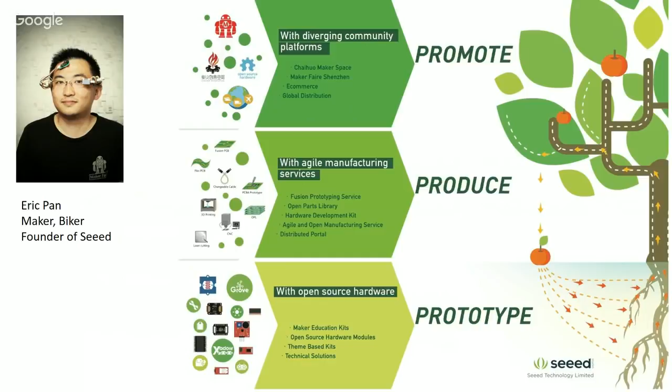First, I'd like to give you a short overview, because I think it's very important to have a different mindset growing from one piece to many pieces. We have a lot of workshops about prototyping, but too few workshops about how to manufacture things.

If we look at the world from an open hardware perspective, it's more like a pyramid. All the makers have ideas, everybody has ideas. But whenever you bring them into a prototype, you become the maker, growing from 0 to 0.1. You have to go further sometimes to have the first working engineering sample, and you become a very veteran maker.

I think a lot of Fab Lab students are working towards this. Like I saw from the last lesson, you've done some PCB by CNC, and then you'll be soldering your own devices first. But today we're going to cover how to grow from one piece to like 1,000 pieces. Whenever you have 1,000 pieces manufactured, you're actually becoming an independent product maker. You can call yourself a hardware startup, because you're not making one product for yourself, you're actually benefiting a larger audience.

If all the stars align, if everything goes perfect, you might want to ramp up to 10,000 pieces. That's where mass production actually happens. If it goes beyond that, you're bridging with traditional industrial resources. It's a huge gap between 0 and 10,000 pieces, but step by step, all the barriers are being lowered. Now everybody, in all kinds of backgrounds, can manufacture their own creations.

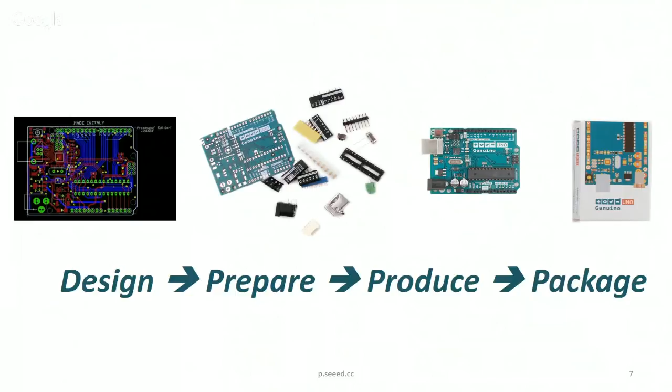So after we disassemble the hardware, on each of the layers we will see these 4 steps. You start with the design. You have your idea, you turn it into a file. Then you need to prepare the materials, collecting them in the same place and same time. Then you actually start to produce and assemble them all into one piece that can actually work. Then you need to package them into a very nice finish to send to yourself or your audiences.

None of this process is easy, because you need to balance between 3 elements: the cost, the quality, and the schedule. They are very much intertwined. If you change the cost, you might affect the quality. If you want to pull in the schedule to deliver to the market faster, you might increase the cost, for example.

You manufacture the same products with the same setup, same material, but you might also have some randomness, thanks to quantum physics or anything beyond that. What we need to focus on is controlling the result inside our expectations. There are so many ways to do that, so many factors that contribute to defects, so many systems and knowledge behind that. But we need to understand that quality is equal from the design to manufacture to deliverable - the only matter is how do you promise to deliver and how do you achieve it. It can be affected by the personnel who operates it, the materials, how to measure and evaluate, what kind of machines you're using, the methods, and also the environment might affect the quality.

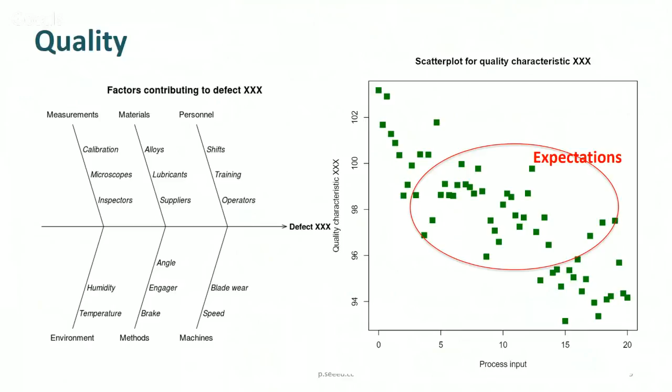And it might be a nightmare for a lot of hardware startups, because the schedule is always unstable. We have already seen so many Kickstarter campaigns delay for even more than a year, or even get cancelled. For the manufacturers, you have a lot of components that need to arrive on time, but the supply chain is very dynamic.

For example, there might be some turmoil in some countries. For example, in Tianjin port in China, there was an explosion, and the result is that at that port, at that time, there was an OLED shipment that was totally destroyed in the disaster. So in the following few months, we didn't have enough OLED screens. No matter how good a plan you have, these kinds of disasters are out of control, and the supply chain itself is not static and might change.

So we need to adapt to the changes. Also the production line has its queue, because the goal of the production line is to keep running to increase utilization - they cannot wait for you forever. Whenever a new production comes, it usually needs to wait for the last batch to finish before starting new ones. If there is any problem, it has to go back and wait again. There are so many things we don't know, problems that are totally unexpected. So because of these issues, before you give up, project management is very serious.

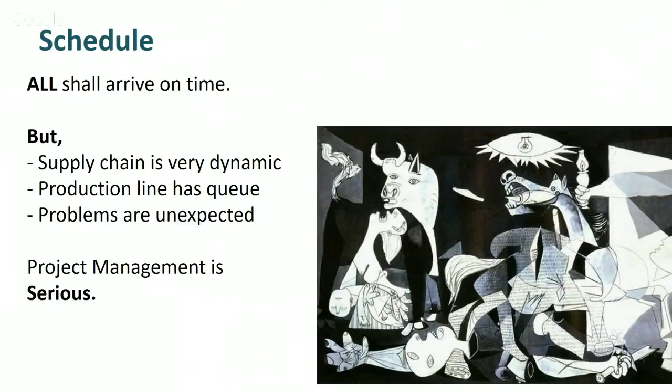And the final thing I think is the cost. We always look at electronics products and we can tell the bill of material cost—how much is microcontrollers, how much is resistors. They don't look expensive, but we need to add a lot more cost into the manufacturing.

Like the manufacturing itself, you need to do some toolings for the manufacturing. That might be some setup fee, but you need to equalize them into the long-term manufacturings.

But what's worse is behind the scenes. A lot of people don't know that they need to consider the cost of engineering. There are also so many costs on management—it's not only managing your team, it's also managing the supply chains, managing suppliers, managing all the disasters.

Then you need to spend quite some cost for marketing, and also certifications if you want to sell offline, that might be a good cost. And also logistics is becoming more expensive because of the shipping hassles, and also because we are doing a lot of innovation costs, because you make mistakes.

The mistakes will generate defects. All the defects, they will be in your bills. So we need to be seeing them very seriously.

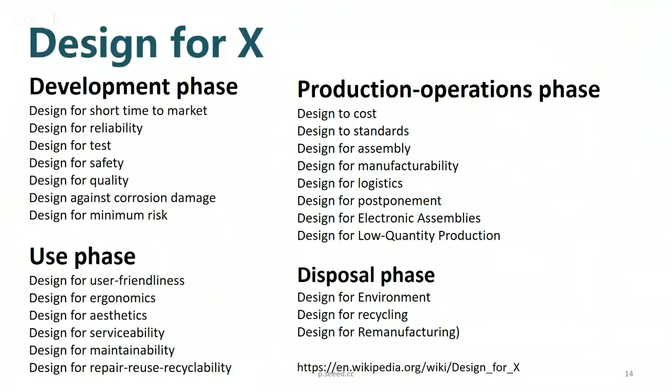We have a lot of issues because people come to the field like a software team. A software team is like a band—you might need only 3 or 5 people to come up with a design to make it working and post them on iTunes. But for hardware, you actually need a big orchestra.

You need a whole team with established knowledge about issues about DFX. So a lot of teams, they come to play orchestra with a band. That causes a lot of issues because of so many things that you don't know. You know nothing, it's slow because you know nothing.

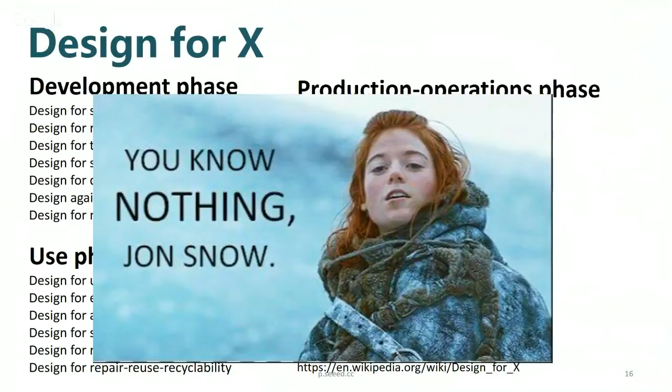You didn't know so many things that the factories knew, that you are not as professional as their previous customers. Because we are newcomers to manufacturing, this causes a lot of problems because of the inequity of knowledge. But the remedy, I think, we look at manufacturing, design from it. A very important element inside of this is open hardware.

We use a lot of open hardware for prototyping. Maybe on your table you have Arduino, Raspberry Pi, so many open things. But it's also a perfect tool for you to consider the supply chains, because you're actually sharing the supply chain with other people using the open hardware.

For next steps, I think we need to open source the manufacturing processes, so we will understand all the strengths by looking at the manufacturing process itself and come back to our laboratory to design something that matches the process. I think that's a hope for Fab Lab, and also what we are trying to do is manufacture decentralized. It should be more like a service covering different locations with the same process and materials.

I think that's where we can make the DFX or manufacturing much easier, because with different teams and different products, we are actually training ourselves and sharing knowledge among different projects. That's a big word, but let's see the details.

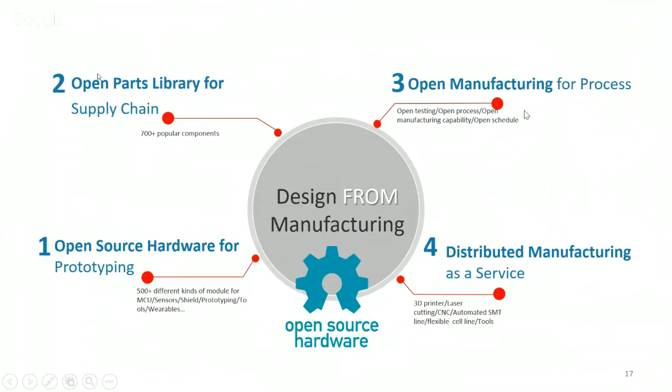So this is one example from our friend called Garley. He has an inspiration of the electronic eggs - he wants to use human beings as the electronic pets. He had the idea about 20 years ago, but didn't have the tools to do that. Now in 2012 he has open hardware. He tried to put together some modules to make the first prototype and a 3D printed enclosure to make it working.

About 3 months later, he started to make engineering samples to shrink the size, working with maker groups to do a layout over again. After half a year, he finally used crowdfunding and SNS promotions to get the idea from 20 years ago into the market. But you see, actually the open hardware has facilitated the whole process.

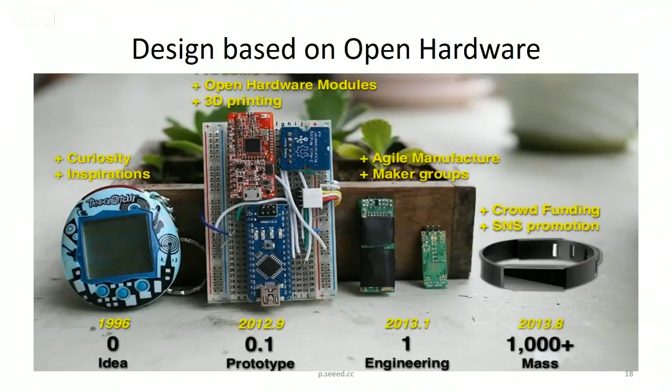Because we are having more and more platforms to suit different usages, and we have more modular sensors and actuators - they are actually combined together to come up with a whole solution. And we will have more knowledge sharing and support from different channels, of course including the Seeed Wiki.

And also we have project inspirations from Instructables, from people's blogs and Twitters. We are actually not only making the prototype easier, but looking at what people have done, have failed, have succeeded. We can follow their paths to facilitate the way we manufacture new things.

And also, thanks to 3D tools, they are becoming easier to use. They are becoming free, and more cloud-based. You can actually open some cloud-based 3D tools to collaborate or find some experts to help you.

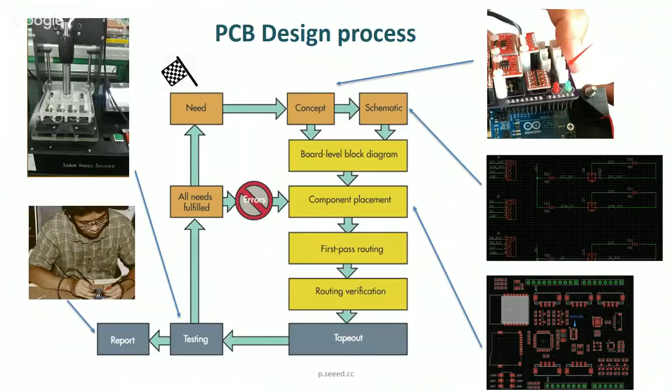So if everything is perfect from what you have seen for that stage, we can move on to prepare - we need to gather all the materials together. If we look at electronic products, I will show you some examples just by my hand, but there are so many categories. We can start from a few.

I think for a lot of us, the major issues are on the components, both active and passive, like ICs, resistors, capacitors, because you might meet issues on lead time and quality. The lesser risk ones are the standard mechanical components, like rivets, screws, nuts, and also standard accessories, which might be very low risk because they're substitutional.

For packaging materials, you need to consider it because it's part of your product, but it might also affect a lot on quality. The materials you use, the printing, the quality, the color, that might differ from what you're thinking.

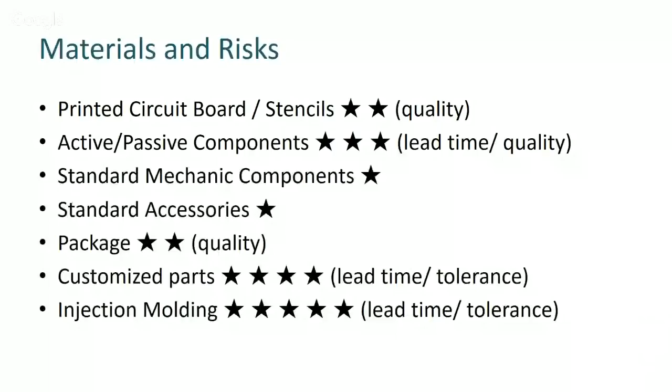You might have seen the bill of materials, but in real manufacturing, if you give the task to someone on the other side of the planet, you need to make sure everything is right, everything is clear, and everything is feasible. I will send the slide later, so you can look into the details yourself.

But there are some hints for the bill of material DFM. Please don't assume people know what you know. I've seen so many bills of materials that just tell people, 'Oh, here we need some screws.' That's it. But how could I know what kind of screws you want unless I have the samples, unless I measure it? So don't assume people know.

And you need to always have a plan B. What if the components you used are extinct? Very usually we just take some components off our desks, or sometimes we unsolder them from other products. But that component might be extinct, unavailable. So try to have a plan B.

And whenever you are preparing the BOM, please leave no room for ambiguity. You need to make sure if you are talking about an IC, you include all the package details, whether it's industrial grade or just something that works. You need to be very, very clear. Imagine that you are working with a computer without too good AI.

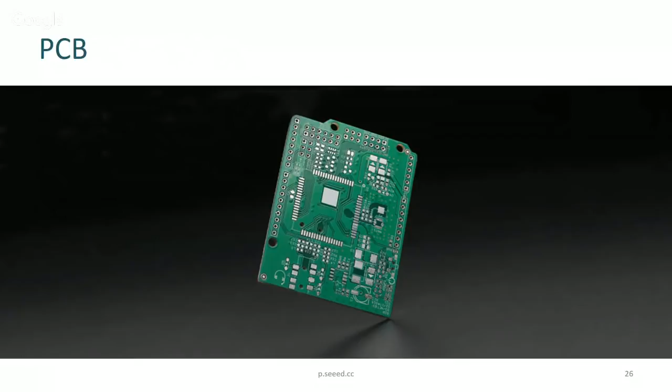So bill of materials, they are a very routine problem in manufacturing. So we look at PCB. PCBs are actually easy because they are very standardized and very digital.

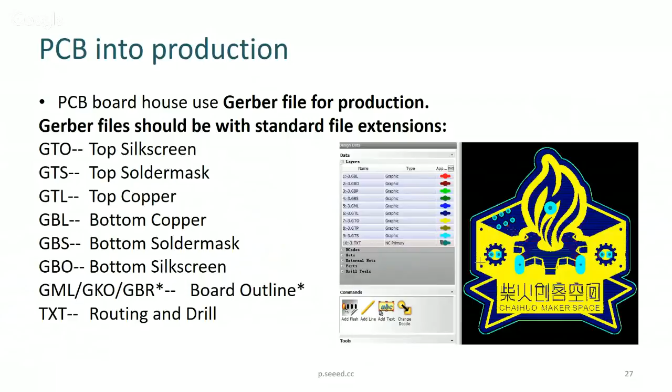Whenever you bring a PCB into production, I think you will learn later in Fab Academy the different layers, screens, solder mask, copper, etc. And here's a video. If the video has too much latency, you can open the links at the end of the slide.

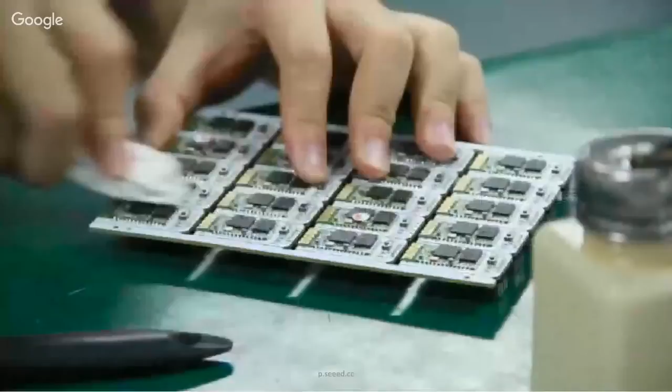But for PCB, we also have some hints for design for manufacturing. You need to look at the supplier's process spec. If your supplier is your CNC machine, you should look very carefully at the precision it has. If you use some fab house to do the PCB, you need to look at their spec, and leave some buffer if possible, because that will increase the yield of the PCB.

And whenever you're designing the PCB, you need to think ahead about how people can assemble the components onto the PCB. So you need to make sure the components that need to be polarized are marked clearly.

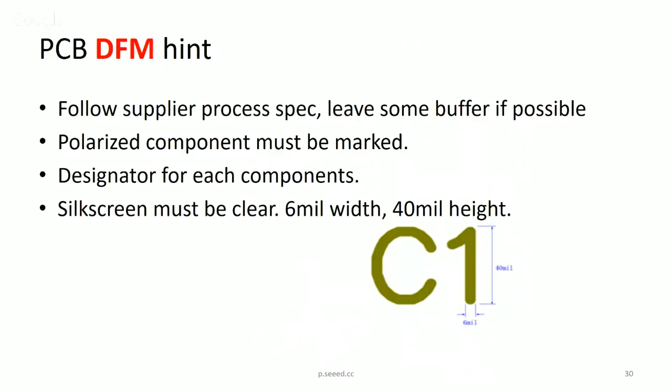I think the silk screen is much more important for the open hardware world, because we are usually shipping with the PCB only, so the silk screen has to be clear. To do that well, you need to control them to like 6 mil width and 40 mil height, so you can guarantee the printing quality.

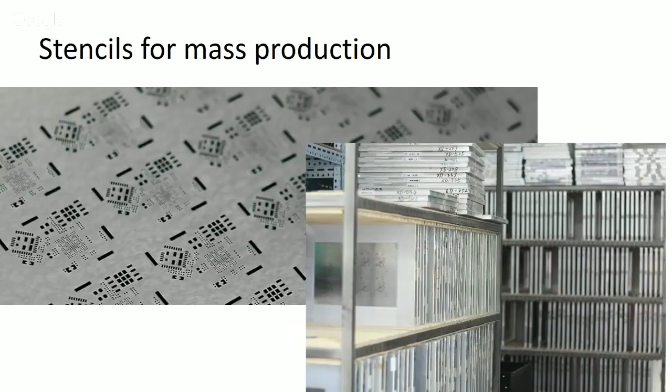After you have the PCB and want to bring it to manufacturing, you need to have the stencils. It's very similar to silk screen printing, but now you're printing with solder. For each of the products, you might have a different stencil. That causes a lot of waste, but it's very critical, and we keep a room of all the stencils, used and expired.

You might be very clear about the active and passive components, but I don't have enough time to explain into more details.

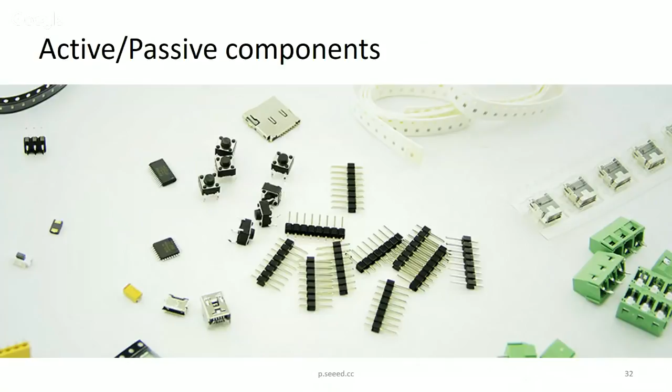One rule is to try to use the popular components. Where can you find them? One simple way is to find the most popular open hardware board, see what components they are using, and try to reuse those components. Like, for example, the ATmega328. That's something you might want to share.

For regular resistors and capacitors, that should be no problem. But if you choose a button, try to use a very standard, very popular button, or you might get jammed looking for that button.

We have an example here where we tried to calculate: among the projects we've done, the most popular 100 components consist of averagely 30% of the bill of materials, which means sharing the library can mean sharing the supply chains. This reduces cost, lead time, improves quality, and is a way for people to share knowledge.

Like Espruino, a project we did for a Kickstarter campaign a long time ago — it went from PO order to shipping in only 20 days. The only reason is that it uses a lot of common, very popular parts.

We'll go into more details. We have a new library called Open Parts Library, and our friends at Octopart also created an Open Parts Library. You always try to work with the community to select the most popular components.

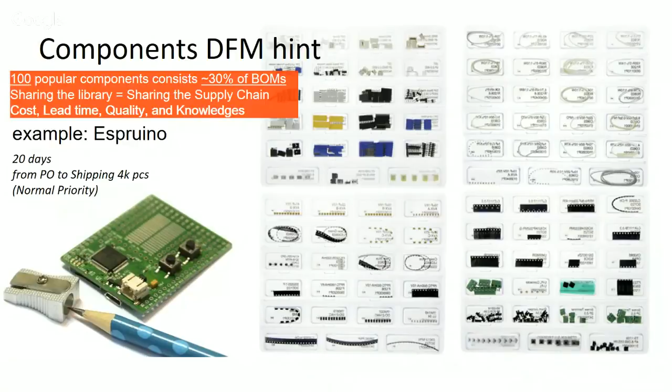We'll also have more standardized accessories, because they're too standardized. For small volume, you don't worry about them, but if you're in a larger volume, you need to find the suitable factory and make a long-term delivery plan with them.

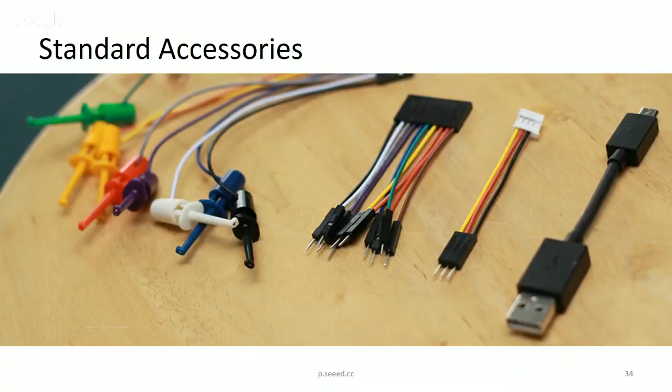Make sure all the qualities align with your specification. Packaging is something you cannot avoid, and it will totally affect things, but it's not the importance of our topic today. Remember, it's also part of your bill of materials — you might want to include the static plastic bag, the stickers, everything into your bill of materials.

Or you might be waiting for them to get the whole project done. For customized projects, I can give an example where we try to align mass production factories with our laboratory — if we can customize in our own equipment, and find a factory that has thousands of the same equipment, it's much easier for the customer's customized parts to get duplicated.

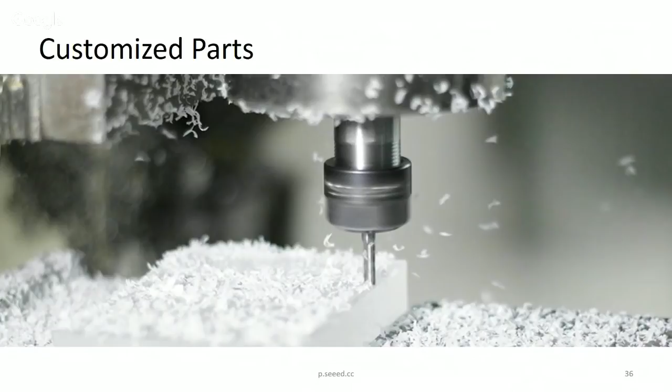As for injection molding, I think it's a very painful process to introduce, so we'll leave it for some other time.

Finally, imagine that we are cooks, we are chefs, and we have all the ingredients lying on the table. The nightmare, the real nervous moment, comes whenever you assemble. Only by assembling can you find a lot of the mistakes — you realize, oh, I have bought the wrong materials.

It's not fun, and if you look at the whole assembly and test process, they can be very complex. But why are we doing assembly and test? It's because you don't want to do it yourself.

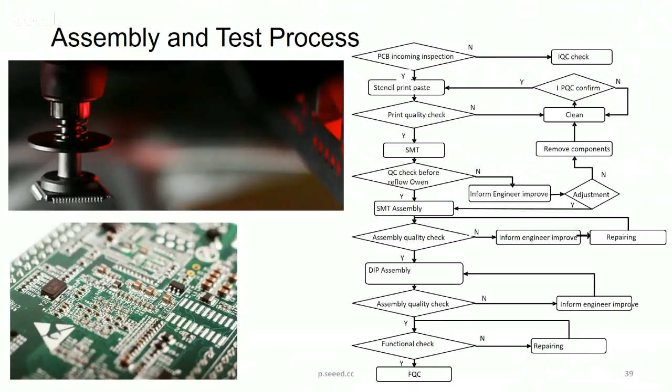So this is how we put the solder paste onto the PCB board. The first layer is the stencil, and the solder will just go down to infiltrate into the PCB itself. That's very simple, but this also requires a lot of precision, and the way you do the stencil might affect the result.

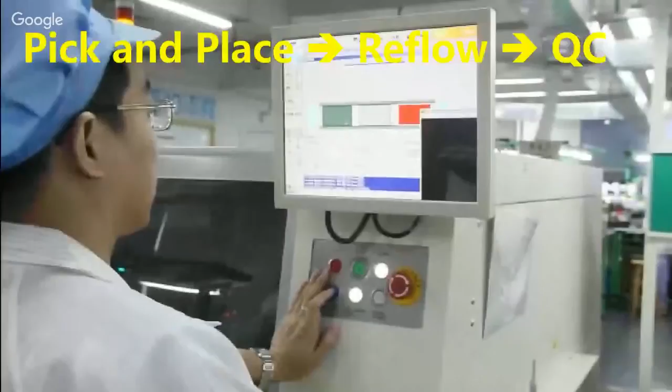And then to pick and place machine, and also for reflow. You might have already seen the pick and place machine. They're actually doing something very simple, putting the components onto the PCB which already has the solder paste. But imagine you have to put so many components onto so many PCBs, and make sure they have the same result, fast enough to save time, and don't make stupid mistakes.

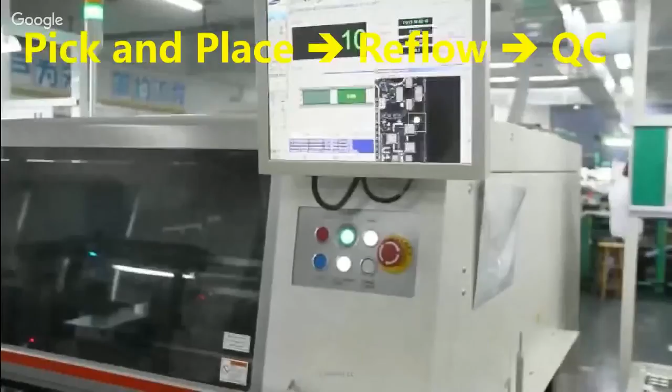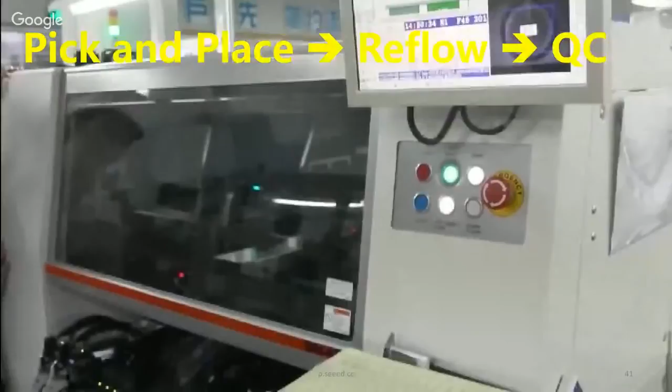So you will see on the screen they have some optic alignment. This is mark point, and this is the pick and place head. Sorry, because it's a bit dark. On the bottom of the screen, there are actually reels of components.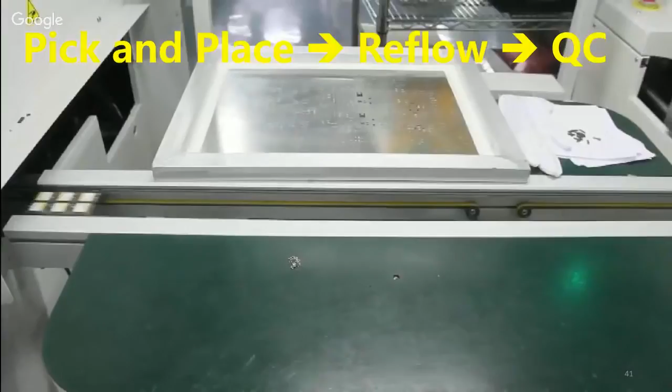Please, if you have time, watch the video over and over again, because you will know how the machines work. And on the other hand, you can design according to the performance and behavior of the machines. So whenever pick and place is finished, the components are like glued to the PCB.

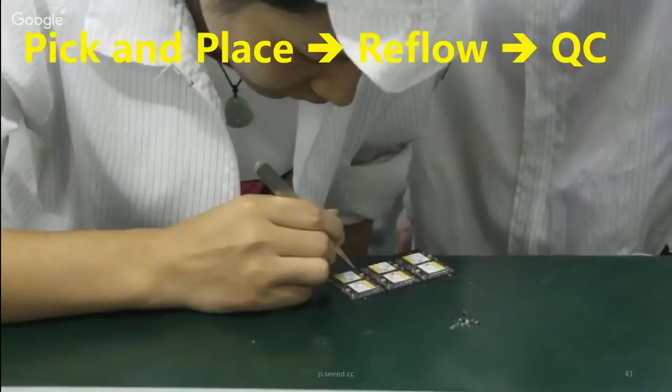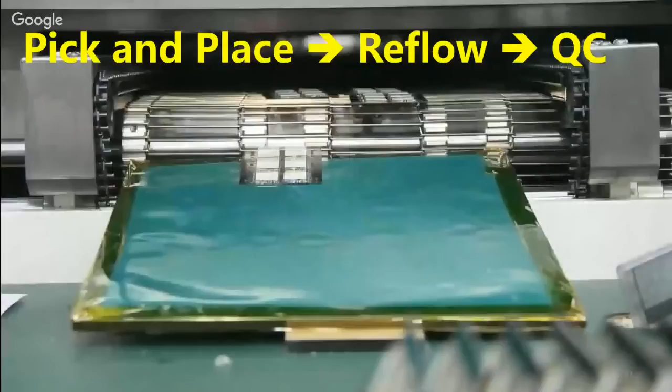They will do a visual inspection to make sure most of the things are right. But they are like uncooked - they need to be cooked. And if there's something too big to fit into the pick and place machine, sometimes for small volume, we use the hand manually to put them onto the board. And that's the oven - it's actually an oven, but with more precise temperature control.

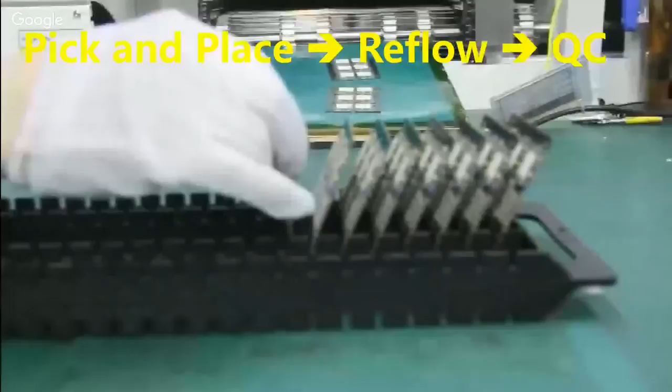After going through the oven, we mostly finish the assembly process, because all the components are in place with the electronic circuit board. And they will do the QC check again. I will show you some examples of why we need so many steps to control quality.

As we just explained, the reflowing oven is an oven, but the difference is they have several zones. Actually, the more heating zones the reflowing oven has, the more precisely it can be controlled. So it has preheating to make sure things are warming up, and there's thermal soak, to make sure all the components are warmed up to an extent ready to be reflowed.

I don't think I'm going to explain so much about that, because you can dig into the details, but that won't affect much what you've done for design. But it's good to know. And also, more important for us is to understand the issues - we are sorting the issues.

The biggest issue for SMT is like tombstoning. The SMT components should line perfectly on the surface, but sometimes one end comes up because the components might not match the dimension of the actual design - meaning the PCB footprint does not fit the component itself. So make sure the pad matches the package of the components.

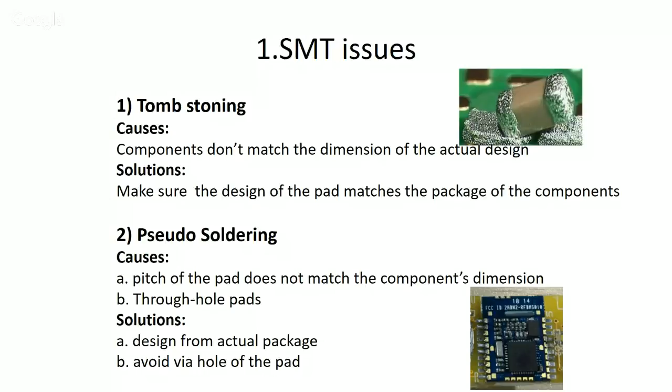So from this we can see a lot of the QC process is to check out and find these issues. But the reason that usually causes these issues is from your design. So you might get your design working in the first piece, but imagine in the long run, in a more complex process on the other side of the planet, they might have more issues than you expected.

And also we have more problems, like there is no mark on the pads, so there might be some errors if we have to process manually. And there might be some mismatch between design and the pads, causing some problems in the manufacturing.

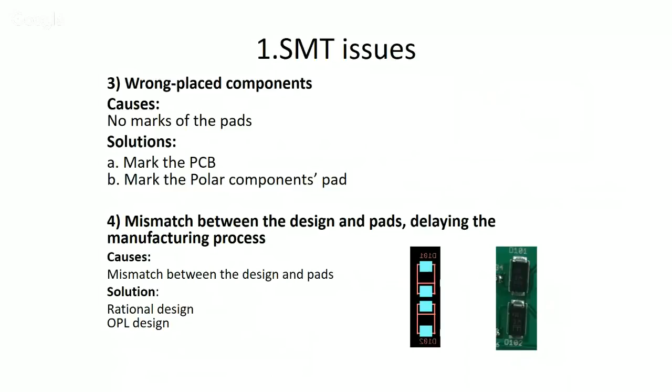So these are some specific cases, but generally speaking, I think we need to have some compassion for machines. Machines are not slaves, they are our partners, they are helping ourselves. So we need to understand how the machines work, and we comply ourselves to try to collaborate with the machines to make sure our designs can be very easily done by the machines.

From that, we can have one more tip, which is we need to align the same components in adjacent order. For example, we can see from the video, the pick and place machine actually gets the components from the reels and then puts them onto the board. So if we are targeting the same reels, they can be much faster than switching to different ones.

And you will try to leave enough margin to the edge of the PCB, because there will be some belt on the edge, the belt might have some grippers. So if you put the components too close to the edge, they might be moved.

Also, during the video, we're actually soldering them on one side, which means if you put components on the other side, we need to do it over again. So let's try to put all the SMT parts on one side of the board.

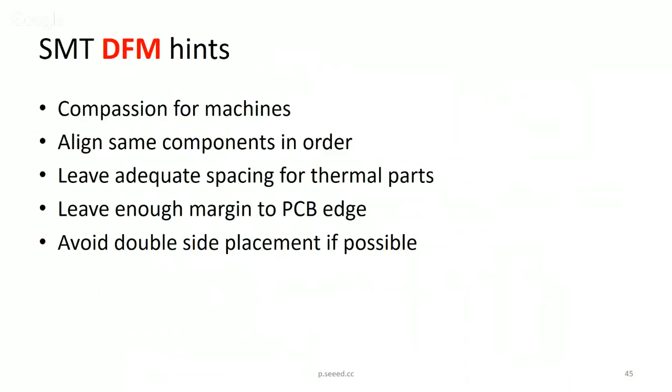And especially for the open hardware community, we are having more through-hole soldering than everyone else. It's easy for hand soldering to verify in the very beginning of the process, but it's actually difficult.

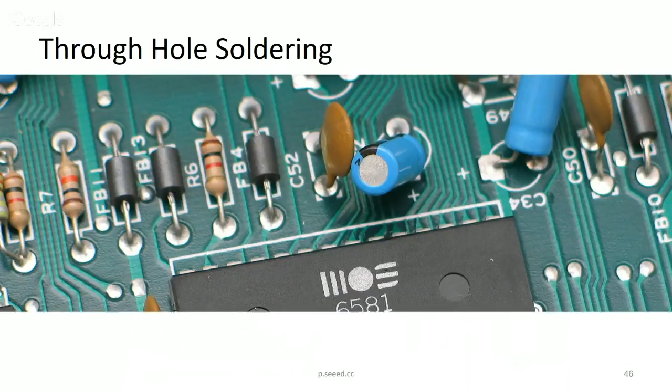This is a semi-auto through-hole soldering machine. I don't need to explain to you how to solder them because you can do it yourself, but it's actually a solder pot. All the boards, whenever they're placed in the right spot, sink into the heated solder and come out.

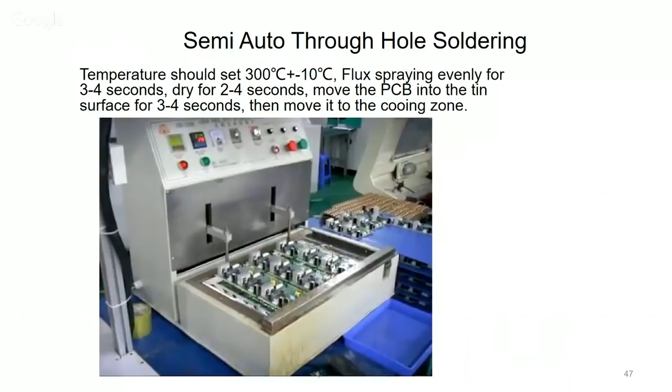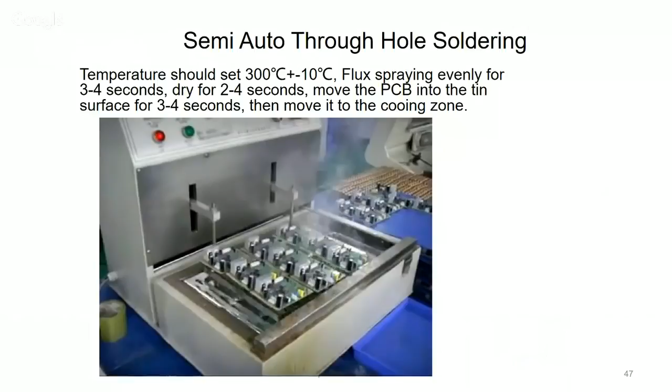So we always see that electronic manufacturing is very close to cooking. It's a part that actually makes this mature. It has to stay in the hot solder for quite a while. You will see the smoke. They are crying, but that's their destiny. And for a while, they come up again. Okay, perfectly soldered, or we can say it's like glued.

And be sure to wear some gloves because it's very hot. And I think the process is evolving as well because you cannot avoid it. Sometimes you have big components, sometimes you have pin headers. And we have some automatic soldering machines, and this is one of them.

So this is like robots. You may see that they require some specific fixtures, and you also need to program it. Okay, I can watch it over and over again.

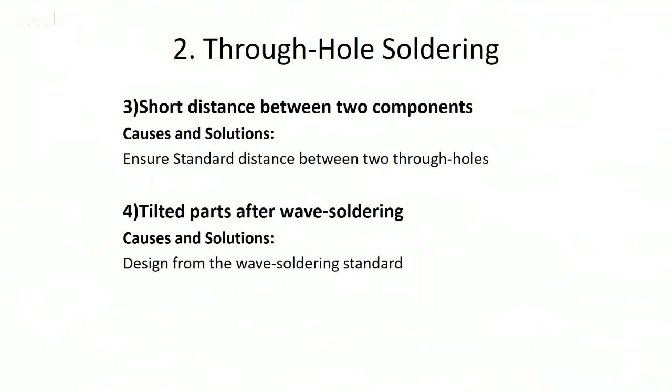And also there might be too short a distance between two components, making it difficult to solder, either for machine or for human beings. And also there are some tilted parts after wave soldering, you might need to strengthen them with tabs or extra support.

So for DFM, I think if there is another chance for you to design, you need to keep space for each component, at least 0.5 millimeters. And you need to ensure the space is enough for manually soldering, repairing, or even verifying. And more importantly, please avoid through-hole soldering if you can, because it really does not fit for mass production.

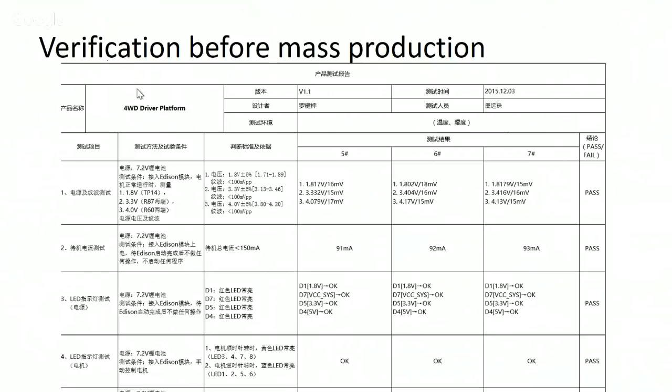There are so many test methods and priorities. Priority means how important it is to us, supposedly to simple open hardware projects. PCB inspection systems, there'll be like e-test, there'll be some visual inspection. We don't need to worry much about that because they are usually done by the suppliers. Secondly, there'll be ICT, called in-circuit test. It's very common for simple projects, and we have used a lot of them, and you might be using that too.

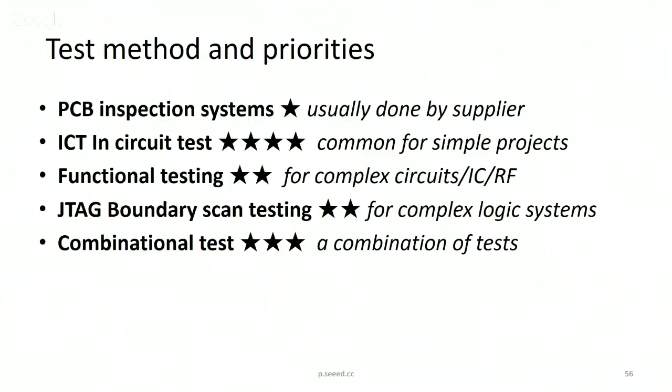We also have functional testing. They are more for complex projects like IC or wireless things. And for complex logic systems, you might have some JTAG boundary scan testing. I think if you have a system like an Android project, you might be using that because there's a very difficult way for you to measure all the memories, etc. But for usual testing, you need to combine some of these testing methods to make sure you cover all aspects of your project.

So what is a good test plan? I've asked some experts and they don't give me a good answer. I'm trying to summarize it like this: a good test plan is actually a killer, a good killer of defects. The most important rule is like a firewall - no underkill. Underkill means it's a defect, but the test plan does not tell you it's a defect, and lets it go. So it has to make sure it excludes all the defects.

But whenever you have all the test means to make sure the quality, you don't want to have too much overkill. Overkill means it's a good product, but you might set some threshold too tight, or it might be disturbed by external elements that you think is wrong. So the best is we examine the units once, and we tell the good from the bad for once. And the testing has to be fast - it's very important that we don't want to use half an hour to test one device on the manufacturing floor.

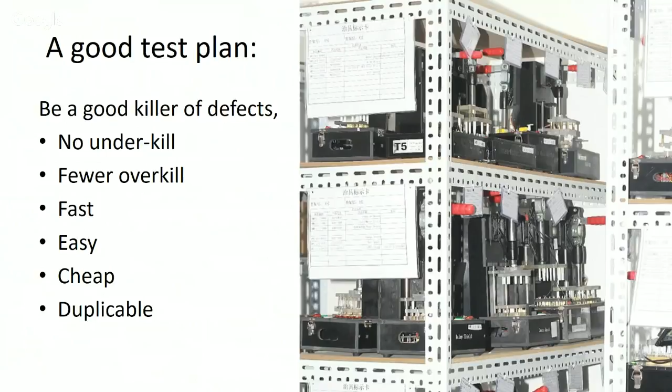And this is the legendary test jig. There's no rocket science inside - you open it up, it might be just an Arduino. To the right is what you see when it's operating. It's better to have some buttons, the basic UI - I know you guys aren't very good at that. And also it's better to have some screen, or maybe in the future we have some wireless network to collect the results. What we show here is a handle, so it's a manual testing fixture. It's cheap, but whenever it goes to large volumes, it can be automatic.

I suggest in the future, you might want to design the test fixture as you are designing the product. The test fixture can be as simple as an Arduino with some special circuits to measure the input, output, voltage, current, etc. And you can use a laser cutter or CNC to make the box.

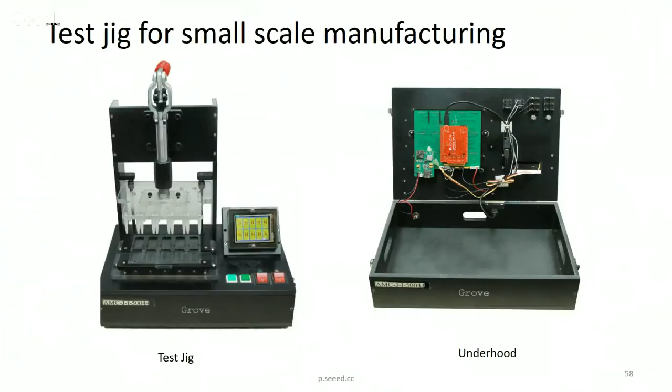You can make it much cooler. This is just some enclosure we get from the local supplier. And the most precise thing is on the test bed. It's like needles on the bed, but you need very precise holes to make sure they match your product. And here is the packaging with the standard operation procedure.

Please don't forget, packaging is something you also need to design very carefully, because it affects a lot on how to assemble them and how to ship them, to protect the product, to make it good looking, for your user to have a good unboxing. I'm not showing the packaging for Reflow because it's taking too long.

It's more than just putting things into a box. You need to put them in a sequence, and make sure everything is placed in the right direction. People might make mistakes, but we can design to make sure nobody can make mistakes.

Sorry, this will be jumping. So for the testing, sometimes we cannot make a test jig because there's no test plan for the design. We need to really consider it.

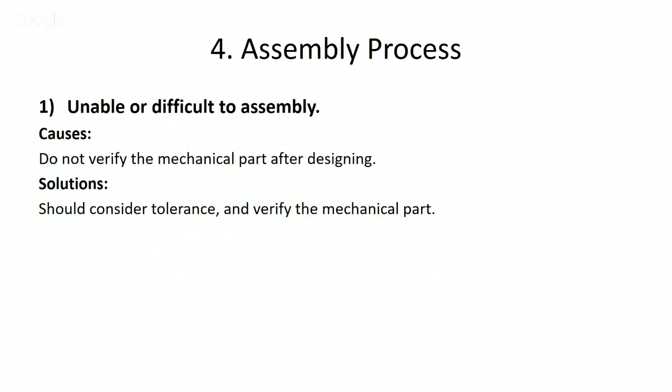And for packaging, people might not know how to package them because there's no clear instructions. We also meet a lot of unreasonable packaging methods.

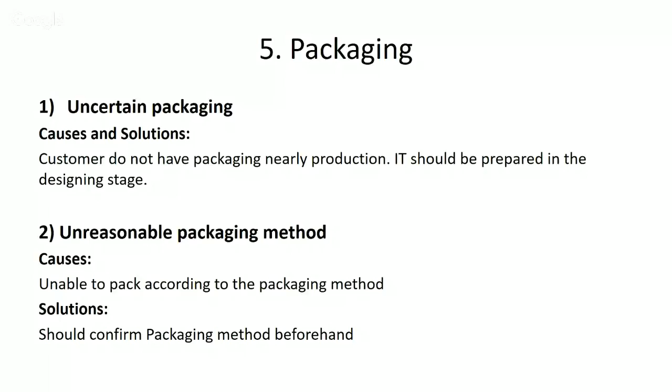So generally, for assembly and test, we try to involve less process, which means if we can avoid through-hole assembly, we don't do through-hole, and we make each process count. We also need to have the SOP, standard operation procedure. It's very critical—it's like programming.

This might be impolite, but you're actually programming someone else to make sure he follows your expectations to accomplish the manufacturing process. Of course, they can help you improve it, but you need to think in their shoes. And we try not to invent in the process unless there is a very critical reason.

Whenever we are manufacturing in large volumes, we'll do a pilot run for small volume manufacturing, like 100 pieces. But don't expect the pilot run to expose every error, because it's just 100 pieces, and it might only cover a small fraction of the basic problems.

And there is a doom: whenever there might be a problem and you avoid it, there will be a problem. So don't overlook any possible risks.

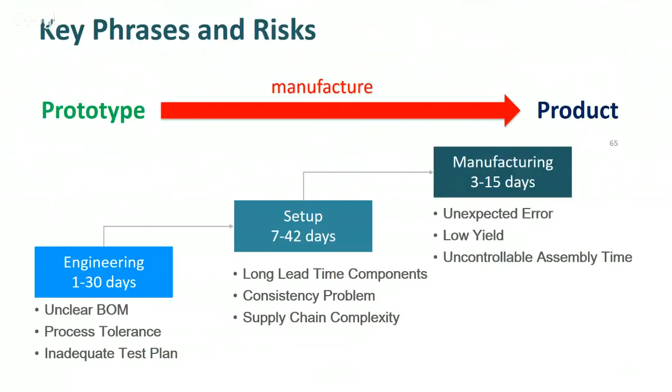So if we can categorize the things we need to do and what the suppliers need to do, you can refer to the chart. I'm not going to read them, but you need to watch the slides afterwards. You really need to consider it from the shoes of a supplier to make sure what you have delivered, they can start something good.

And tips, again, for producing thousands of units, there are 5 simple tips. First, we need to balance cost, quality, and schedule, and consider the overall cost. It's not only material cost, it's everything, including your time. We need to use popular components to avoid risks or problems. Also, try to involve as few processes as possible. And this might be a stereotype, but please try to use SMD components if possible.

Okay, I'm not sure I have the right to leave some homework, but I will leave you some practices and you may try to do that. I did this in the last Open Hardware Summit. It's a very important process to try to manufacture something yourself. Let's start with something easy. I believe there are a lot of good designers among you guys. How about we redefine the hat?

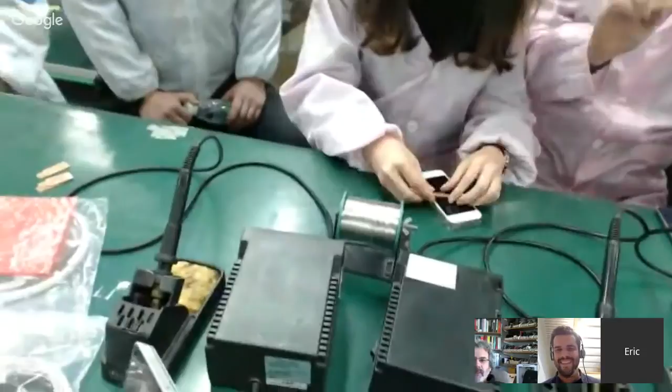We have the Fab Lab students from Shenzhen, and since they didn't want to go through VPN to Google Hangout and back, they moved their atoms to our factory. So this is our factory, and you'll see they are also trying to do the homework from the last session. Some are doing good, some are not. We'll also show you some of the things we are manufacturing.

Oh Eric, you're mute, and we lost your video. Give him a minute to come back. Send him a note.

How many viewers are there, Tomas? At the moment, 95. That's great, the max was 110 actually. Okay, you're back Eric. Okay, I'm back.

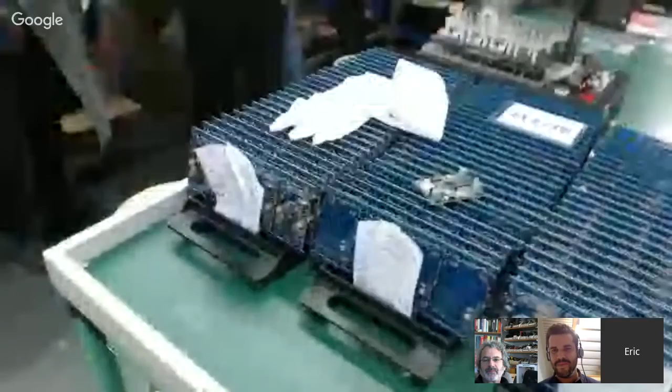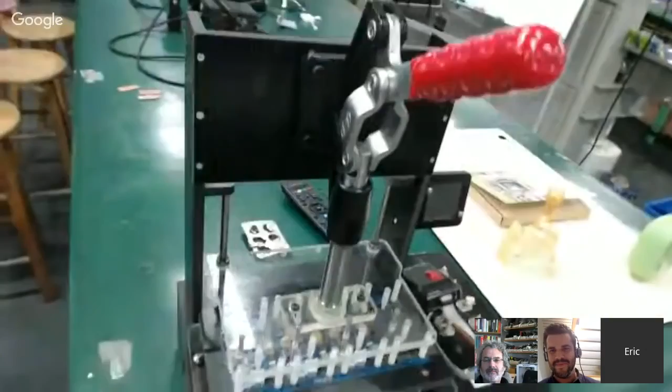Let's say hi to the team again. Hi, and so a little quick pan around.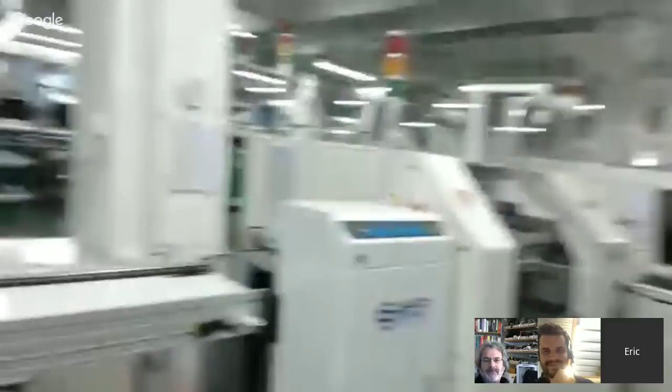That's the factory we have, and it's empty because people aren't working overnight. That's the machine we're talking about. This is where we put in the PCB board, and this is where we put solder paste onto the board, it's silent, it's sleeping. That's a pick and place machine, you see all the rails, each of them is one component, and you'll see more rails on the other side, like magazines.

We have a lot of spare component rails, feeders, because we want to shorten the process of switching. You see that's our library of stencils, each of them means one product, and most companies use these components. What I've suggested you guys is to try to reuse popular components as much as possible.

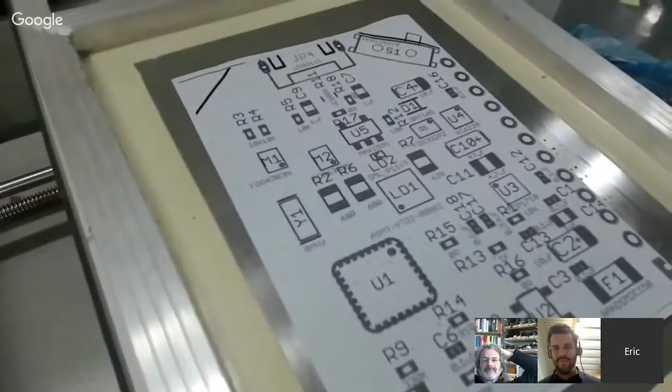So here we see some info for people to see the layout. Whenever they're putting components onto the board, there are marks that match the components according to the bill of materials. And here are some SOPs, basic operation manuals for people to follow.

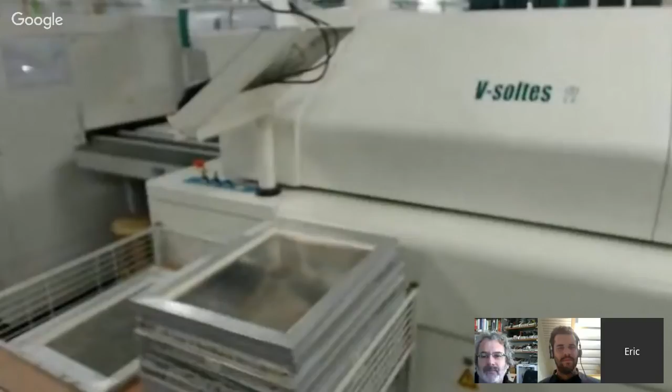And that's the entrance to the heater, which will be heated to 200 to 300 Celsius, so that's the reflow oven. After the reflow oven, people will verify them, so you'll see some in-process boards.

Great, okay let's get to some questions now. Yeah please. First, what time is it there? Sorry, what time is it? Oh, it's 11pm, so we're having our Yuanxiao festival, which is the middle of the night. Good, thank you for staying for us.

So I have a smaller question and a bigger one. The smaller one is: if somebody from the FabAcademy wants to work with you and Seeed to transition to commercialization, what's the right way to work with you? How should they contact Seeed? I think in the future they have to go through the lecture first to understand all the problems of design for manufacturing. And of course they can contact us through many means, they can just go to our website.

So they've come to your lecture, they'll do a final project, it's been reviewed, everything's nicely set. What's the best way for them to contact Seeed at that point? I'm joining the Google Plus group, they can just find me there. Also, in the slides I'll leave a message with a special contact email box so people can just write in.

Also, one comment on that: we have one product actually going from the FabAcademy to Seeed, it's Smart Citizen. We can announce that. Okay, now here's the bigger question.

Fab 12 is coming to Shenzhen. Oh, I forgot to say welcome. Well, so but more than that. No, but that's too easy. I'm going to make it harder.